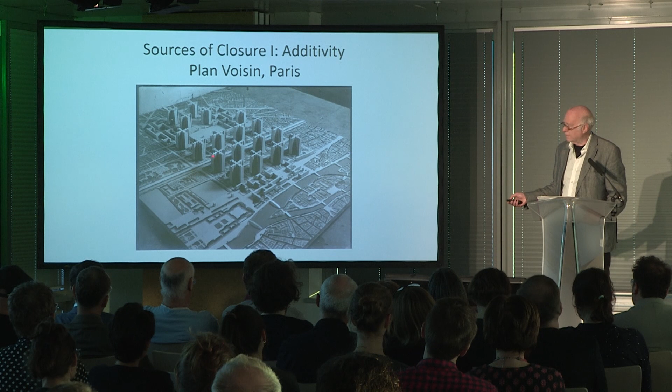I show you this because it has one of the contrasting characteristics of a closed system, which is additivity. Corbusier thought you could add more and more of these towers, that you have parts which can just be added to almost ad infinitum. He wanted all Paris to look like this. The structural property of that is that the whole is equal to the sum of the parts. That's a basic characteristic of a closed system.

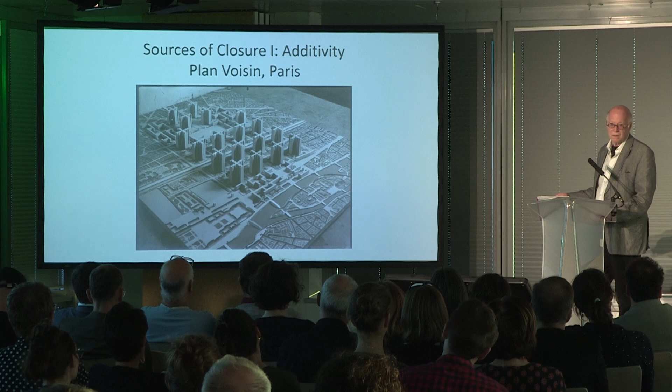You don't have synergy, where you create something bigger, where the whole becomes bigger than the sum of its parts, because it interacts. This is a painful lesson we've had to learn in planning at the UN, because we need to build at a very large scale. In a city like Delhi, the population increases by 700,000 every year, so you can't do a Jane Jacobs sort of thing of nice slow growth. You have to provide at a large scale. But how to avoid additivity is a very, very important issue for us.

I'll show you one other failure.

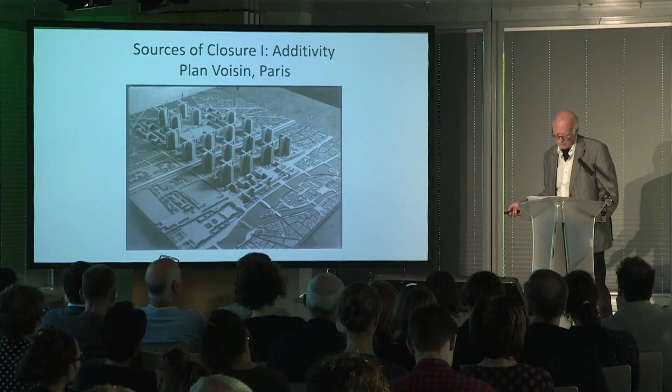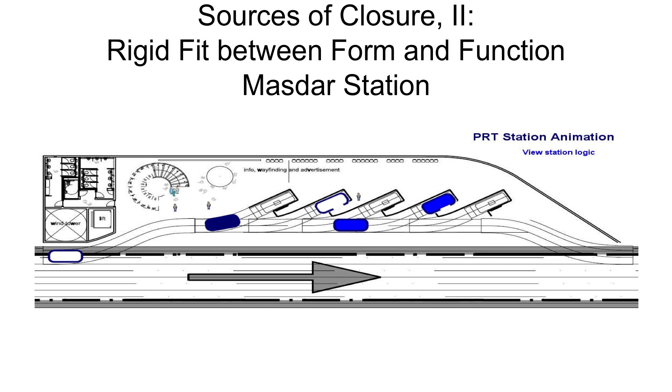Here it is. We're now at the opposite end of the sorts of things that the UN is concerned about. This is the city of Masdar, a smart city in the UAE. Part of its planning is to create places for driverless cars to park in the city, to move people around. This is a model, actually built, of what's called a docking station.

MIT then began working on the weight and size of the batteries of the cars that were going to be in this docking station. They were able to shrink the weight of these lithium batteries, and therefore shrink the size of the car, which made a huge problem. If you got out of one of these new cars, you would have a 26 centimeter gap between you and the docking station.

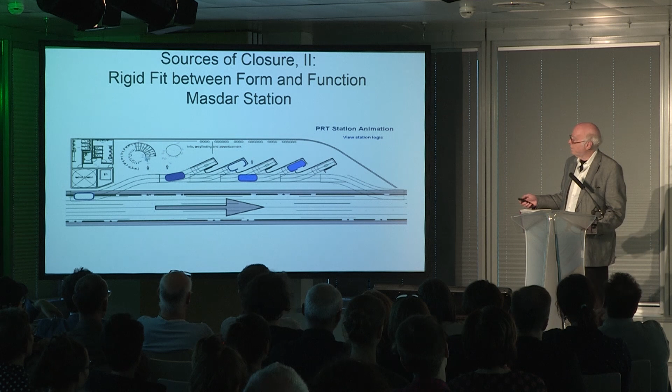The thing that they were worried about, which was a source of closure, was too tight a fit between form and function. It's a structural problem in a lot of commercialized smart city planning. You get a solution for a problem, an element evolves like this, and suddenly this tight fit between form and function has meant that you get technological obsolescence. Something that completely serves its purpose is a recipe for something that is going to die in time. There's no evolution.

This problem energized a lot of the work at MIT that's been going on the last 15 years about how to avoid this problem of tight fit and make smart cities that were looser fit between form and function. I would say that the elements they've come up with, in an open system, not necessarily an urban open system but more largely, is that an open system is nonlinear. That is, things are allowed to deviate, to change. Something unexpected like this comes up and the system can absorb it.

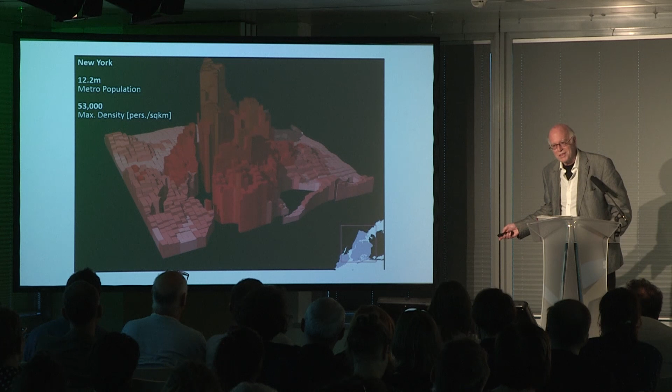We are doing a lot of work on density as a form of open systems. I'll show you one of these, and this is a very nice image of it. We're doing experiments on, if you take one density and one square, an equal area, different ways of building housing from closed to open.

This is a closed way. I have to be careful with this, you may die. This is a closed way. This is a Corbusier way, and it's what you see around here.

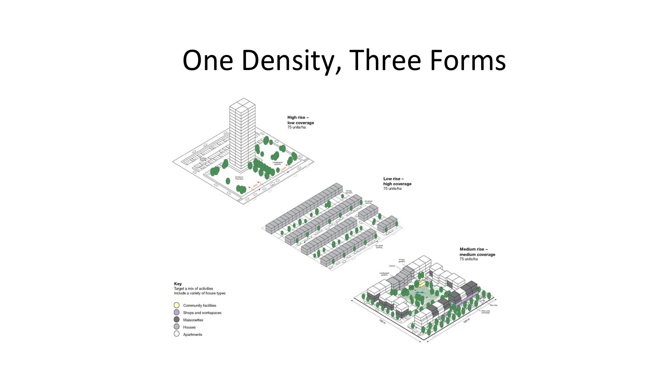You have a tower surrounded by emptiness. This is a traditional way. It's the same density here, the same area, a street. Unfortunately, the public space in this traditional street is very difficult to use by people because it's clogged with cars and so on. So we're doing experiments with how to make modular forms of housing.

All the shaded areas here can be replaced. I was inspired to work on this by the errors that we made in Dharavi about how to make courtyard spaces, essentially, which are public spaces that can be refigured in time. And that's the work of sort of opening up.

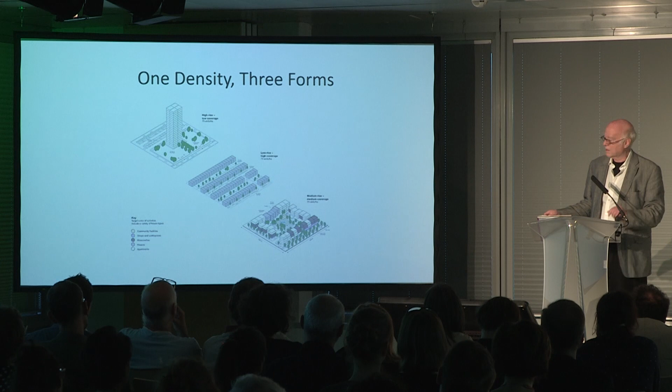It's a perimeter form. You can see what it is, but it's a perimeter block in which all the parts can be taken out. And I want to show you one. I'm not going to talk about that.

This is an early project that I did when I was a planning commissioner in New York. This is an example of incomplete form, or treating a Western piece of infrastructure as though it were like Nehru Place. This is the West Side Highway under 125th Street, to the south is Columbia University, and over here is Harlem.

Before we started working on this project, the black, poor Harlem and rich, mostly white Columbia University never intersected. So we treated this as an incomplete form, waiting for something more to be done. And we put in this very ugly grocery store, which makes all architects say to me, how could you do this? But it's a place for physical meeting between whites going to get a carton of milk and blacks, where they're physically intermixed with each other.

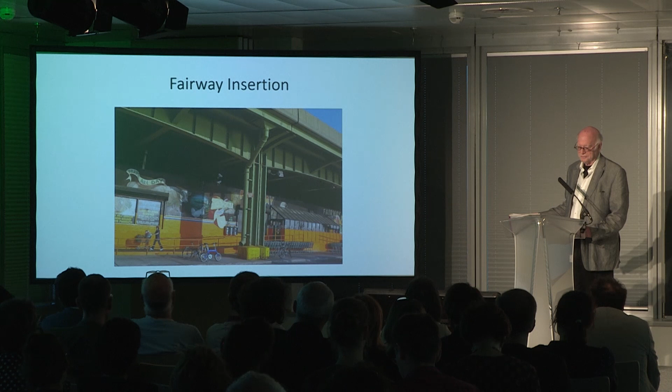So that's basically the project of my book. And I'm just going to end by showing you a photograph. You will find in my book...

Here we are. You will find in my book a lot of criticism of Jane Jacobs. I think she is an urbanist whose idea of slowness and of small scale are not suited to building cities at the scale we need to build, certainly in the developing world.

And she said to me, you don't understand what a city is. He has a right to be here as well. Let him sleep it off. He's not doing you any harm.

And that's a kind of urbanity which I think in a way we need to recover in urbanism, but not by her means. I mean, it's a kind of humanity about differences in a city that I was very ashamed of myself when I said, maybe we should move him, Mrs. Jacobs, and she said, not at all.